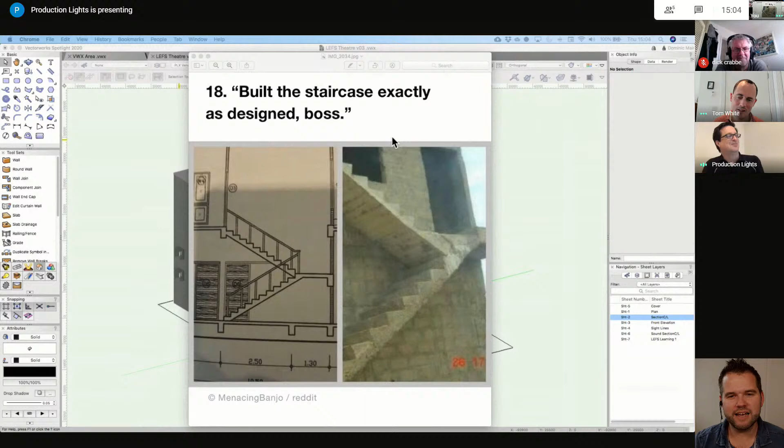Hopefully this will fire screen sharing up. Yep, that's incoming right now. Here it comes, there we go. Cool, yeah, I found this in the week, and it goes back to conversations that Tom talked about, and we've all talked about why 2D and 3D, and why sections and understanding your plans. I hope you can see this - it got built exactly like a section, exactly what was on the drawing. No kidding, yeah, incredible, it happens in the real world. I'm not sure which part of the world that was in, but all good.

So what are we talking about this week? Sections - I'm going to talk a bit about sections. I think Tom's also going to talk about sections in a slightly different way. So we showed a couple of weeks ago with Dick's drawing how I managed to show his information in sections, so we could see where the loudspeakers were going, where they were sitting underneath balconies and sightlines.

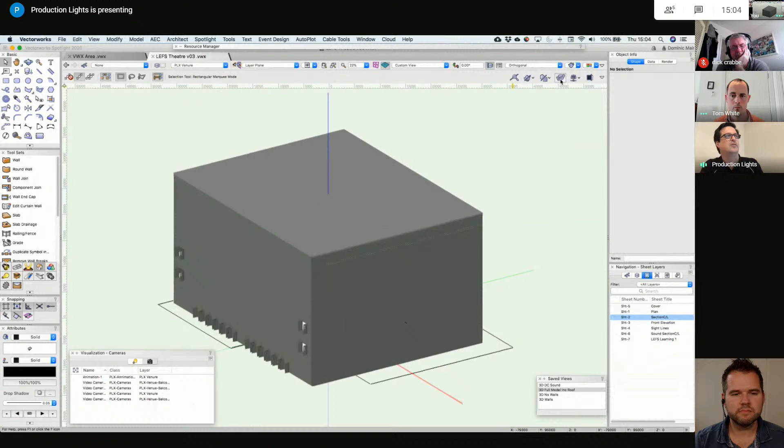And I thought I'd show in Vectorworks how we deal with that and what is possible. So it's back to the theatre I built before, and everything is inside it. In Vectorworks we have something called Clip Cube, and Clip Cube allows us to cut through a drawing in any plane. You can go top downwards, and it's very useful when you're working in 3D and want to see something - you can just clip yourself in.

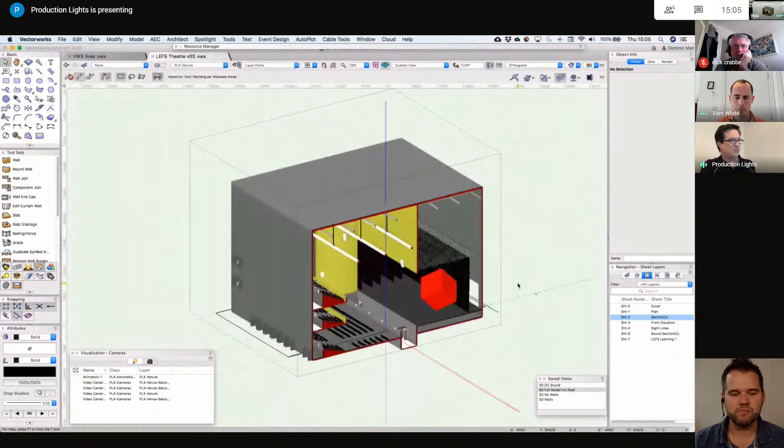But one of its most fantastic features is I can take a face. We can go from there, and look at this section point, which could be the center line. I've actually just come off the center line to catch this piece of the set on the stage. But when we've got the clip cube, I can ask it to section this face. So if it selects a face, you right click on it and it creates a section viewport.

We get all sorts of choices at that point. It's going to call it section 2 because it's looking at a sheet called 'LEFS' - I put something on earlier just to test it and deleted it. We can give it a title, so we'll call it section 2A or something like that.

We can choose a scale for it, so we'll say 1 to 100, and we want to put it on there. Pretty much everything else we leave as is. You can choose classes and layers, what's visible within it. So I'm going to click OK, and hopefully it won't take too long to render this out.

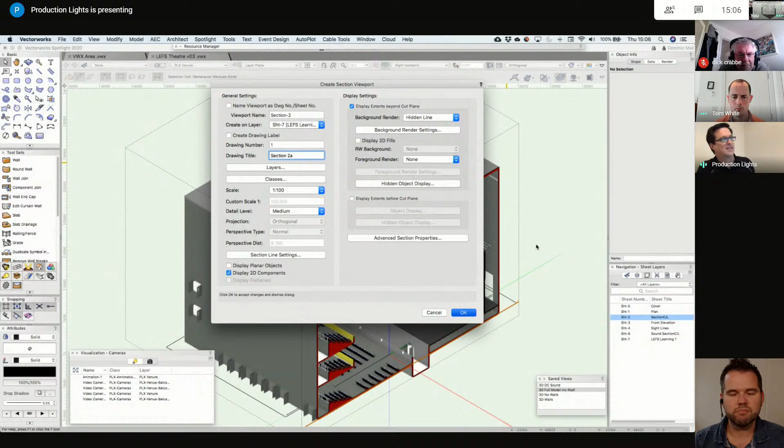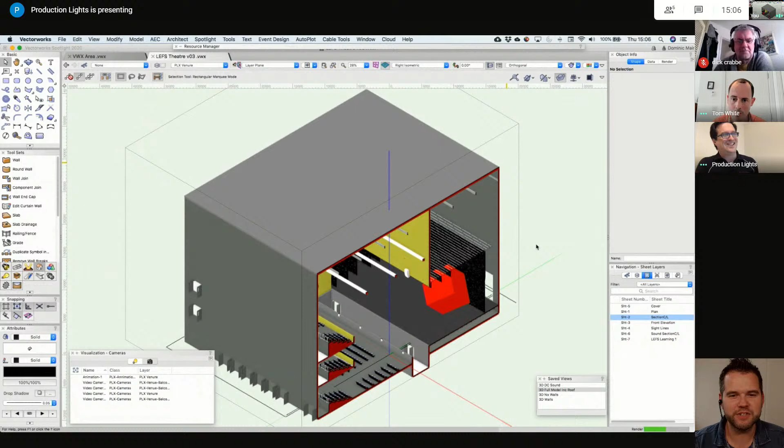What it's now going to do is cut this section. Watch with me in the bottom right-hand corner of my screen - it's going to cut this section and put it onto the sheet for me, hopefully, if I was talking and concentrating at the same time. It gives you an idea - you did very well there, Tom, trying to explain it while driving the CAD machine at the same time. And then there we go.

And it's done it. So we're now looking through that section, and we can obviously see where the cameras are. We can see where Dick's beautiful speakers are, and we can see our bit of set.

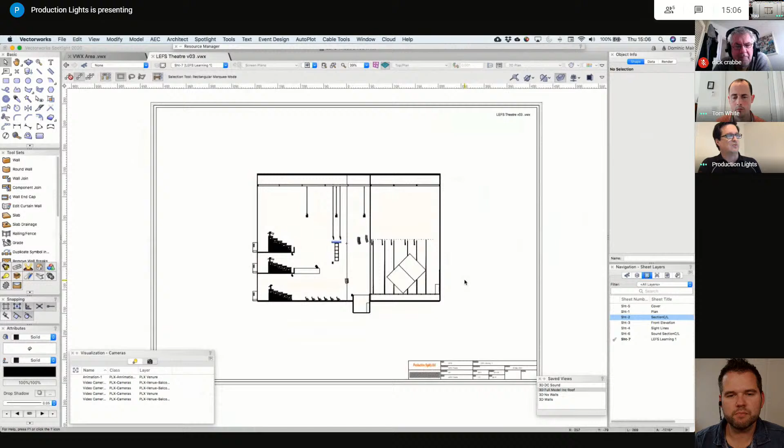A general rule - we haven't talked about rules much recently in CAD - but I'm pretty sure Tom will agree that a lot of people we work for ask us to annotate, so details, measurements and stuff like that within the paper space, within this layout space. In AutoCAD, you would just draw around this viewport, but in Vectorworks it's slightly different - we annotate within the viewport. So I double-clicked on the viewport, and we get annotations, crop, section in place, and design layer we can change.

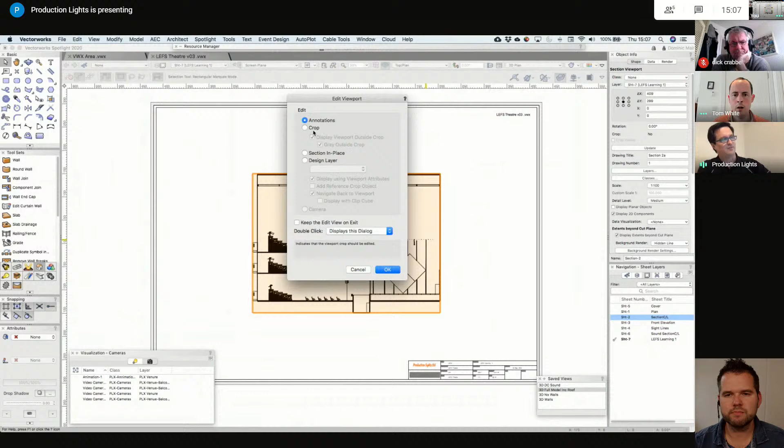The crop is, as it sounds, I can cut out a bit of this section, but in this instance we're interested in annotations. The one I briefly talked about before was sight lines from the upper balcony.

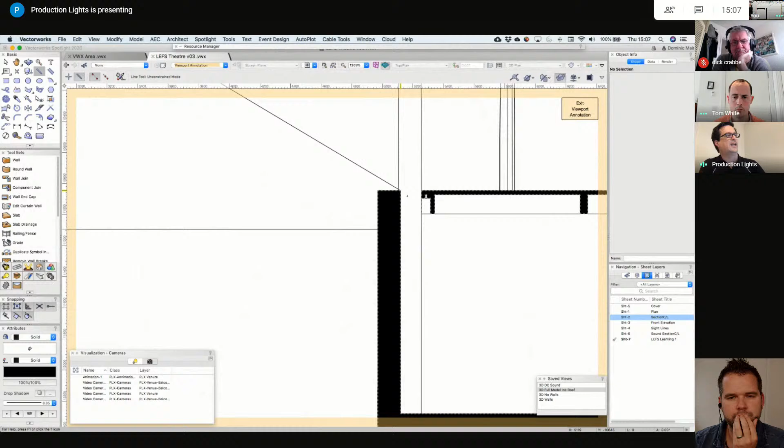So we just grab a line and come out of, say, somebody sitting in this chair slightly above it, and we come down - we're looking at this lip here, what they would not see over the heads of somebody else. If we cut that down to the forestage, so the edge of the orchestra pit, the edge of the stage is just back here, and we drop a line there, we can already see that this balcony is clipping that view.

I know it's a very theatrical way of looking at things, but it's something we always have to consider. So I then select the line again, and we move it back, and we can see at what point, if I bring the screen down, we wouldn't be clipping if we wanted to use that upper row.

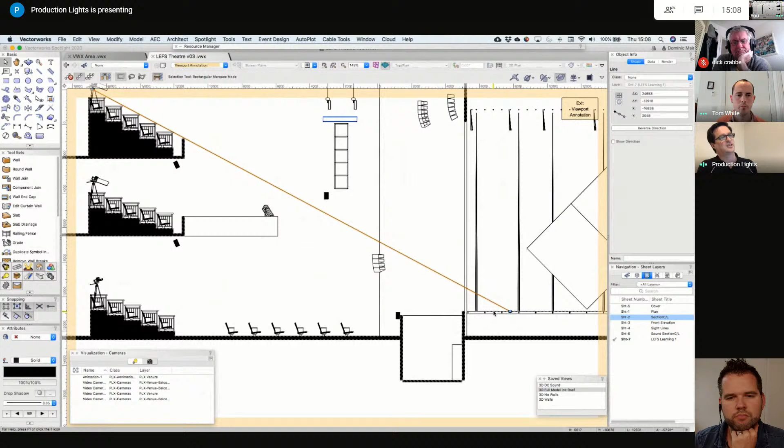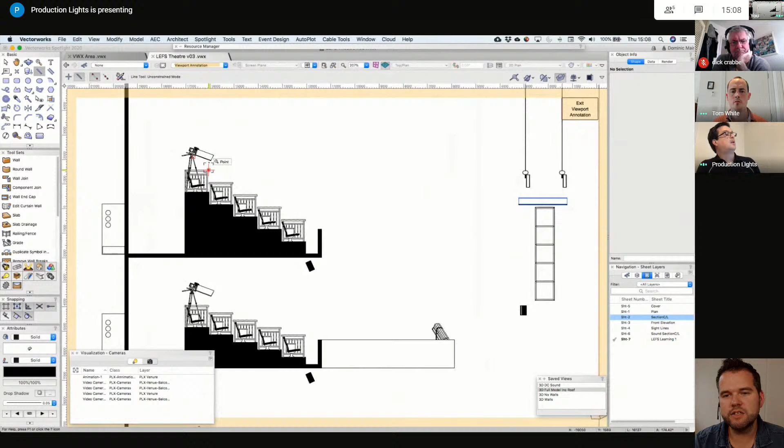It's going to be a good couple of meters back on the stage - you would see their toes from the back of it. Another interesting line is just sectioning - if we ended up just on that... so you're just saying that if you're going to put a camera up there on the back row, it's in terms of whether you'd be able to get a full shot, or whether you'd need to do a kind of mid-chest shot. You couldn't necessarily get down to their feet if they were - you couldn't get a full height shot down to their feet, you couldn't come onto the orchestra pit.

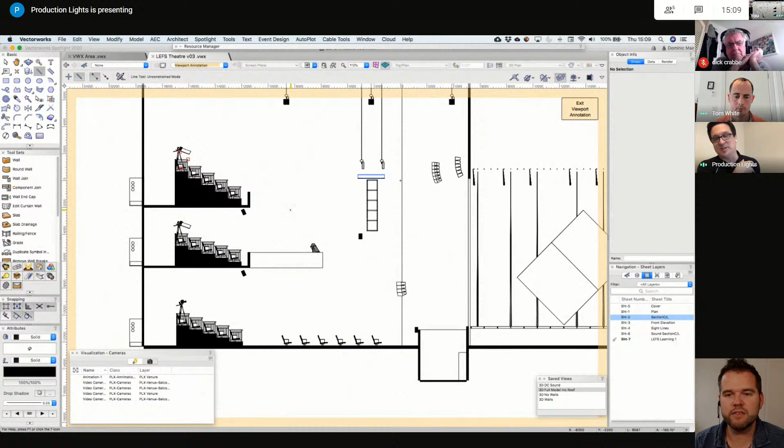More importantly, the punter sitting up there - we can jack the camera up, but the poor person sitting in the seat, which we can't move, wouldn't see something far downstage. Obviously if it's just a standard head or face shot, that's going to be above 6 foot, so maybe it's all right again, I suppose. But if you were doing half body or anything down to the floor, that's different.

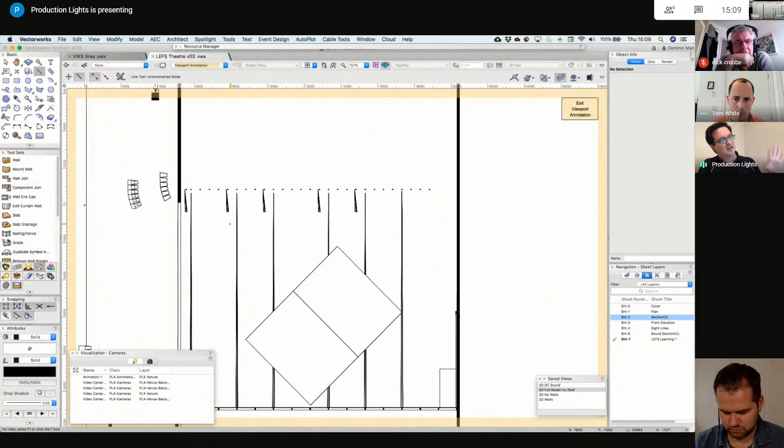And it's exactly the same - again, very theatrical. If we come to the top of the pros and come through, so that'd be the top of the pros - what would be missing if people were flying stuff in above the pros line, at what point they would actually see it. So this is all useful stuff for setting lighting bars, setting speaker arrays. We can see Dick's actual center speaker array here - he's sitting just above the pros line, so we know we're clear, and that's all good.

Another classic one would be if we were a corporate going into a theatre, which is not unheard of, and we wanted to set up a projector somewhere around here. We've done many shows that way.

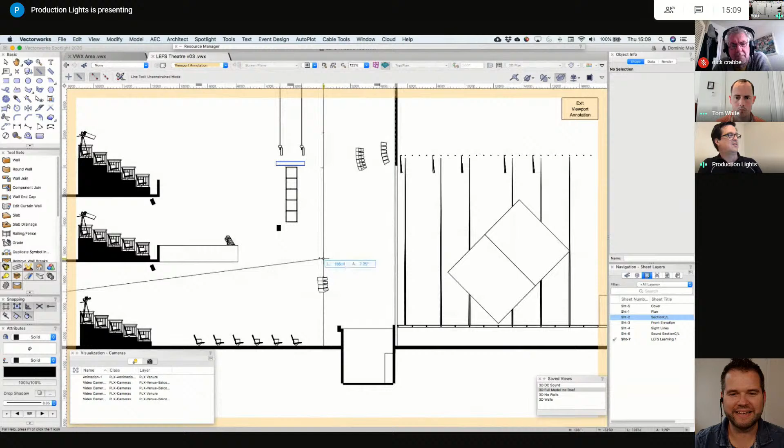What we're actually looking at here is Dick's speaker halfway through. So here's a permanent house speaker, and that's actually limiting how high we can fly that screen on stage. There's our first limit point.

So I would suggest if we were talking in early production, we actually bring the projector up to the mid balcony, and we did exactly the same thing here. Then we get the ability to go much higher within the space, so you can fly the screen higher, and people can walk underneath it, and we're not shadowing, etc.

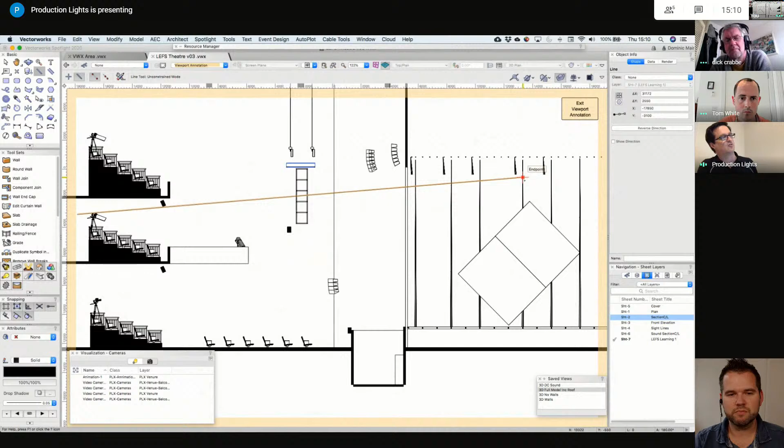So this is kind of showing the importance of sections, and from my point of view, what a section can do in 3D, because that's just taken out of a 3D model. Once we've got this model built, we can very easily move stuff around and find what works and what doesn't work for us.

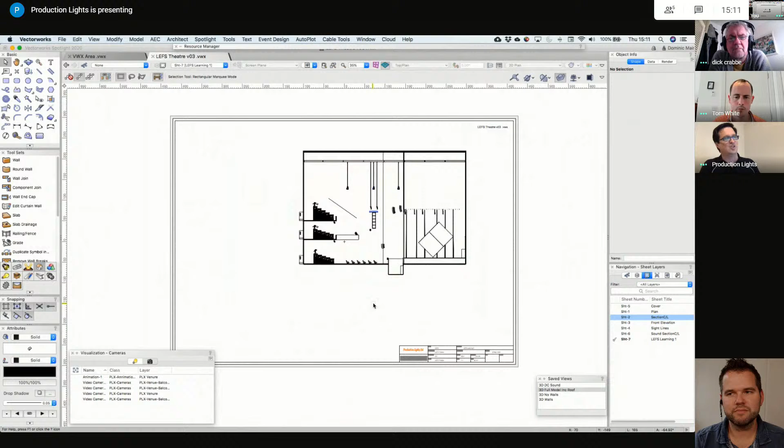It's that first initial data of getting it in there, and then we can very easily edit. I'll just quickly show one more thing that AutoCAD users don't have. If I then draw this line, or draw a line anywhere, when I come out, that line of sectional annotation actually stays with the viewport. So when I move the viewport, I just pick it up and move it, it goes with it. In AutoCAD, that doesn't happen. You have to pick up all your annotation around it and make sure it moves with it. So it's just a nice little thing that Vectorworks does, trying to make life easier.

So is there an option within AutoCAD to do this section through? I'm thinking of the Athens arena that you shared with me—yes, fine, you can see it from left, right, top, what have you, but you can't cut through the middle, or I don't know how to cut through the middle.

You can do, yeah. Let Tom speak. Cool, go for it, Tom.

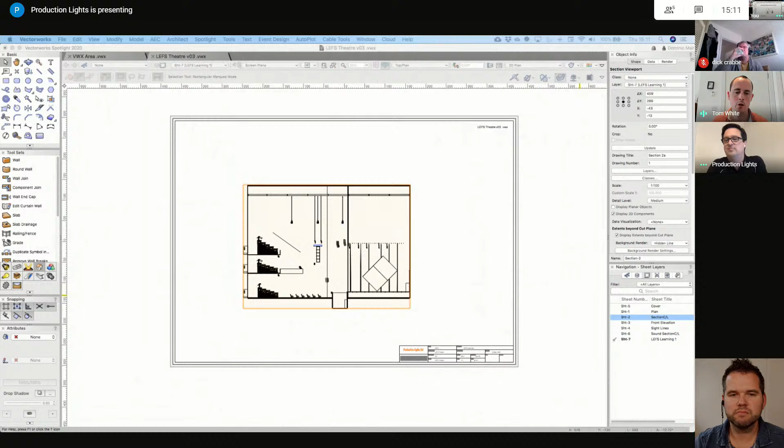I suppose the first thing to say is the description that Dom has very clearly gone through looks, at a glance, a lot easier than doing the same thing in AutoCAD. But the two tools that I would use to do something similar to this is the 3D clip, which seems very similar, Dom, to what you did in the model space. But to produce this, you couldn't do such a nice drawing as Dom did with 3D clip.

So you would use view base, which is the Revit style layout drawing. You'd have to do a plan of the space, then use the section command to cut through it, and that's how you produce a drawing. It seems that the steps that Dom went through is much easier to produce a clear drawing in Vectorworks, in my opinion, at this stage.

It's something I've done both, and the sectioning in AutoCAD would have taken longer to cut through than it did in Vectorworks. I use the section command, and it lays it out separately within the model space, and then you make your viewports from that. So to answer your question, it's possible.

And presumably then you determine the two lines at either end of the section that you want, and do it that way? Do you?

Yeah, so I'm wondering whether I've got something I can bring up. Dom, could you just talk for a moment and see?

Yeah, of course, absolutely. In Athens and in all the models I've done where we've 3D'd, you draw a line through. Think back to when you still drew on paper—you used to have your plan and project up on your plan with rulers, and then you'd start marking up. That's exactly what you're saying. You cut a line in 2D through what you want, then run a section command and it projects the slice up from there looking through the model, which is why it takes a little bit longer in AutoCAD, I think. Maybe Tom has got something for us.

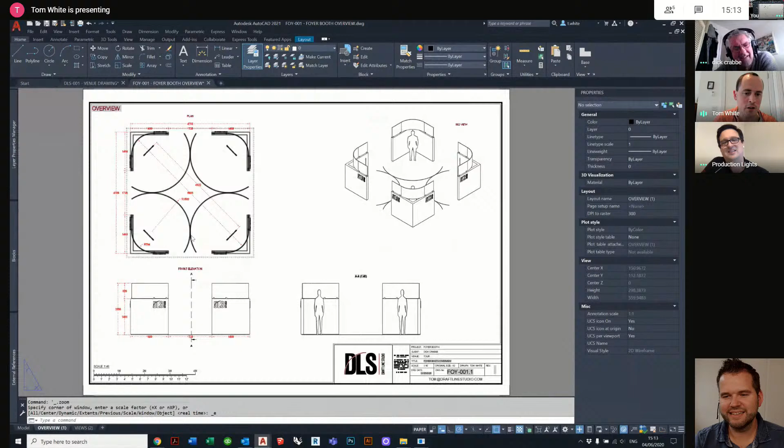So I've got a screen which hopefully you'll be able to see, and I think Dick, you might have seen this before. It's your drawing, but essentially I have drawn—unfortunately I couldn't bring up a venue very quickly, but I've drawn something in 3D. So I've got the model space, I've done shift middle wheel to see that this is in a model space, it's in 3D.

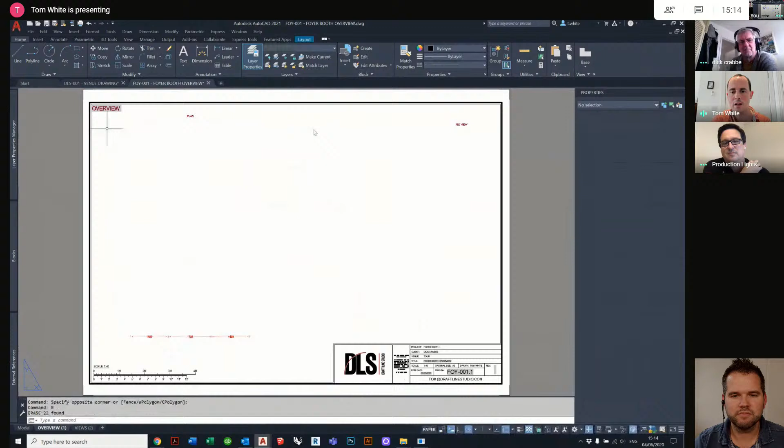In AutoCAD, if you draw something in 3D solid, which is often the way you draw in AutoCAD—not the only way, but often the way—you can use something called view base to do the layout. So if I were to temporarily delete all this information in layout space, I go to the layout tab, I do base from model space.

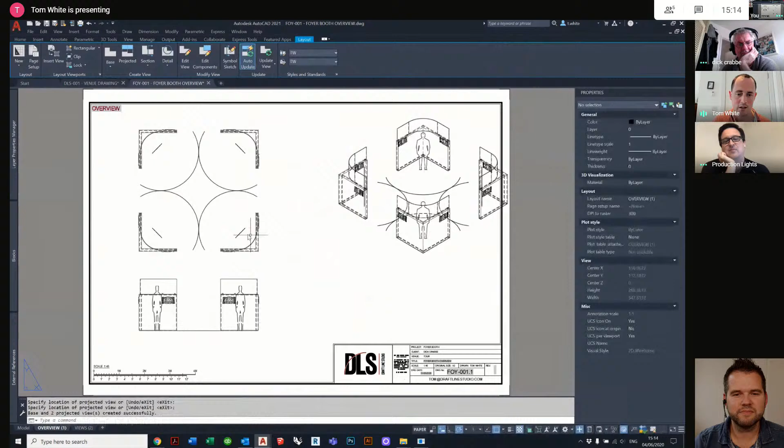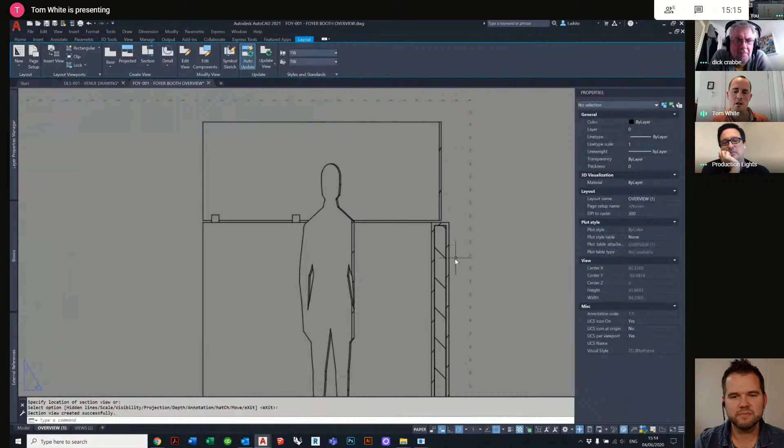This is where, in my opinion, it seems a lot easier in Vectorworks, because to do the section, I'll use the section command here in the chosen location. I let it think about it, pull it down, press enter, and now it's done a section through. You can see it's a section because the person's arm is missing, and you can see the internal construction of this element compared to the front elevation, which is my logo on a wall.

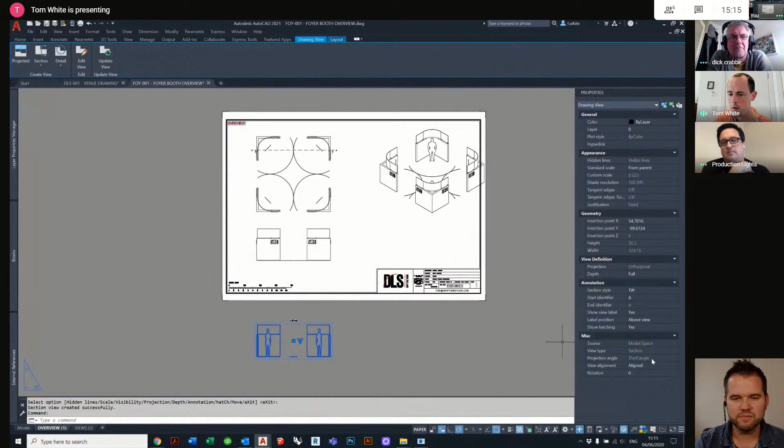So this is my opinion of how you do something similar to Vectorworks, Dom. I don't know if you agree or think that's something slightly different. No, it's getting to the same point - you can give that information. You could have easily cut through a whole building at that point in time to see the section lines.

I don't know if you could explain what Vectorworks is doing, but let me quickly explain what I believe AutoCAD is doing here. In model space, I have a 3D drawing, useful to tell a story, which is why we try to do nice clear drawings, but not necessarily useful for graphics - for example, if you want to import it into Illustrator, which is done sometimes. So the view-based command is doing a 2D representation of a 3D model. As a consequence, we're looking at 4 views, which we know is a 3D drawing, but it's represented in 2D. So what you can do is export layout.

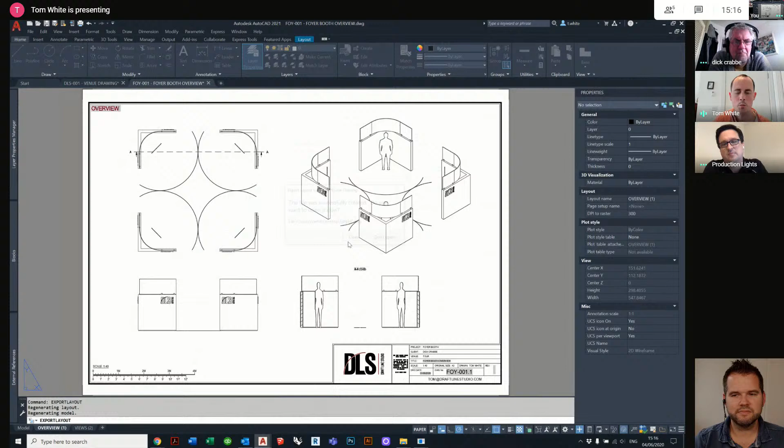You type export layout in the command line, and in this circumstance I'm going to save it on the desktop. What it's going to do is export this viewport into a new drawing. It asks, would you like to open the drawing? I say yes, and do zoom extents. And in model space, I now have what was a 3D drawing totally 2D, which I find incredibly useful.

Dom, could you explain in Vectorworks when you're using the section command, is it a live section through the 3D model, or a 2D representation as it's going along? It's a live section because it's connected - so if I go in and edit something within the 3D model, I just come over here, click update, and it will update my section at that point in time.

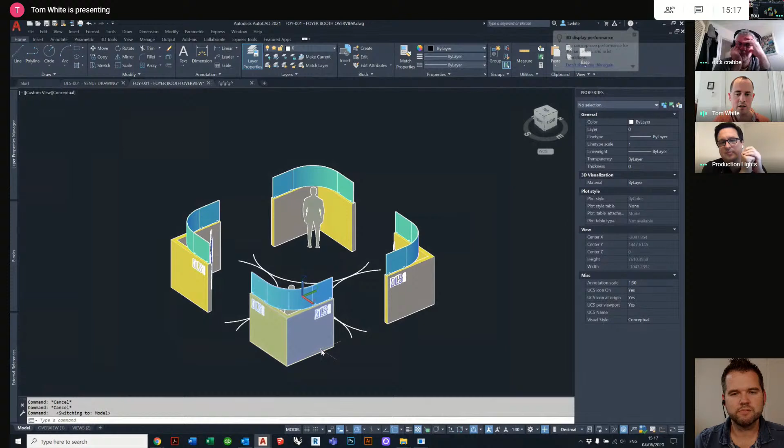It does the same in AutoCAD. I could go into here and delete this and go back to model space. But I don't know if there's something similar to export layout in Vectorworks, though this is a tool I find really useful because it's a totally accurate drawing, but totally 2D. So if I go to front elevation, it's totally flat - it's been flattened. It's a flattened drawing, isn't it? So it's lightweight, but it's not something actually ever done in Vectorworks, to be fair.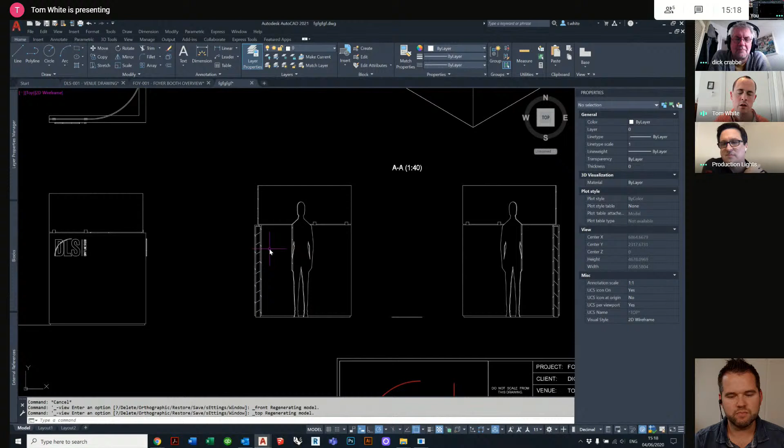No, it's not a tool I use to flatten. If I have to flatten a drawing, I tend to flatten it, but exporting beyond that isn't something I normally need for workshops, because Vectorworks has a fantastic ability to send to a graphics company or something like that. It's probably the negative limitations that AutoCAD has. The section command you were showing us in model space - you technically have something vaguely similar in AutoCAD, but I don't think it's as powerful as Vectorworks. This is my only way of knowing what it actually looks like in 2D through that section line. It's probably much easier in Vectorworks, and this is my opinion of one way you can get around it in AutoCAD - exactly the way I would fiddle my way around it.

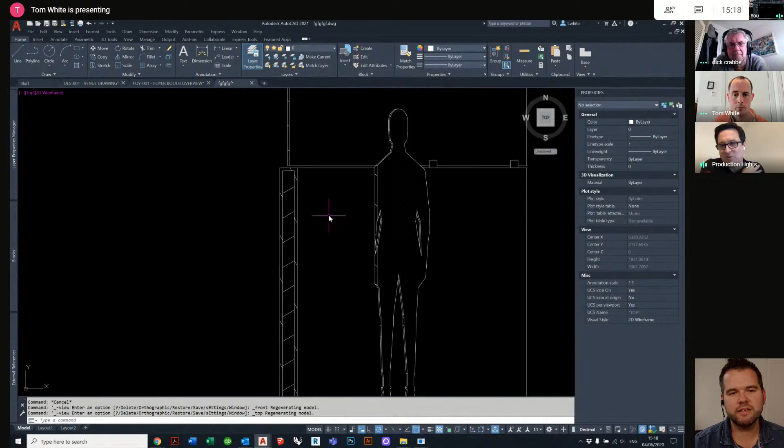I guess the key thing is that different software achieve things in different ways, and there are benefits to either route, but sometimes it's about what you know. The speed at which we've seen Tom do some of his demos is absolutely incredible, but it does look as though there are maybe in Vectorworks some workflows that are much quicker in the first place, which I think is quite interesting.

Dick, have you found any elements in DraftSight that you haven't been able to do, or have you found everything you wanted to do so far? I think that one's interesting because it's such a different price point compared to the other packages.

I think at the moment I haven't found anything. I'm slightly struggling, but I ran out of time with getting the Lisps to work, though it understood them, downloaded them, and can definitely do them - that really is a brain ache. But as far as I can see, everything so far has worked, and so many of the commands, even if they're not exactly the same, it seems to recognize and turn them into the command it should be for DraftSight. The attributes all worked too.

I'll just very quickly, to answer Dick's question, show you a section of Oakland Arena. I hope it'll come through. Got it? Yeah, you got everything - that's everything in one go, Dick. So that's set, screened, rigging, building, all there.

That would have taken absolutely ages in AutoCAD to cut through. It took a couple of minutes in Vectorworks - did make all my fans spin on the computer, but it's exactly the same thing. So between theatre and the arena, there's a cross section through the centre line, and each way, X and Y, so people can see where stuff is. It gives a graphical representation.

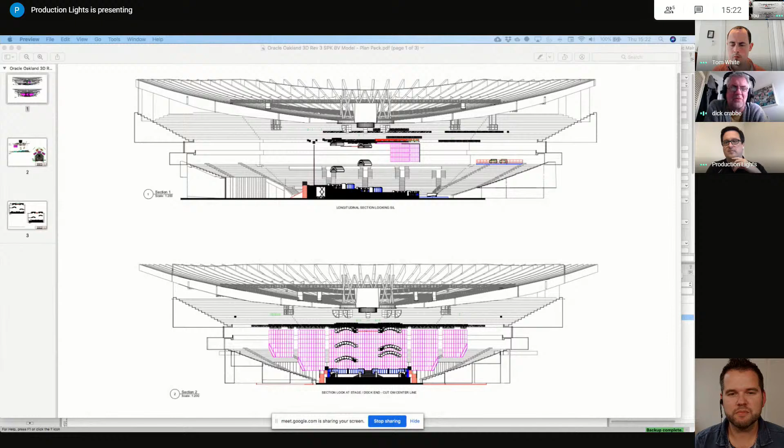This is one I've played with, and I think I showed you briefly a couple of weeks ago, of turning it into d&b's ArrayCalc, which is what they use as a sound prediction tool. It took me about 2 hours to map that venue into ArrayCalc, but I'm trying to use it to tease D&B to get them interested, and maybe other sound engineers too.

So that we can try and build up a point scan of venues, so that rock and roll touring technicians who are daily changing venues, if all of the venue plans are there, they can just import them into whether it be L-Acoustics or D&B, whoever's prediction software, and actually get an accurate plan straight away, and let the computer do the thinking of where the array should go and how they should be hung. It's something that is so easy once you've got an accurate plan.

It is amazing, really, to think we spend such a lot of our lives trying to fix the sort of ropey venue plans that we get given. It's incredible the amount of time I've spent tracing a PDF, trying to guess whether it's right or not, then going and doing a recce and checking a couple of walls or doors, or in some cases measuring up a lot of the room manually to check back against the PDF I was given - and then, oh look, the PDF was insanely miles out. In this day and age, we shouldn't really be working that way, right?

No, and as Tom says, it's the biggest part of the cost differential within drawing - how good is that initial data. If you've got to go back and spend a day checking it and redrawing it, it's crazy, when we know we can easily generate accurate data very, very quickly.

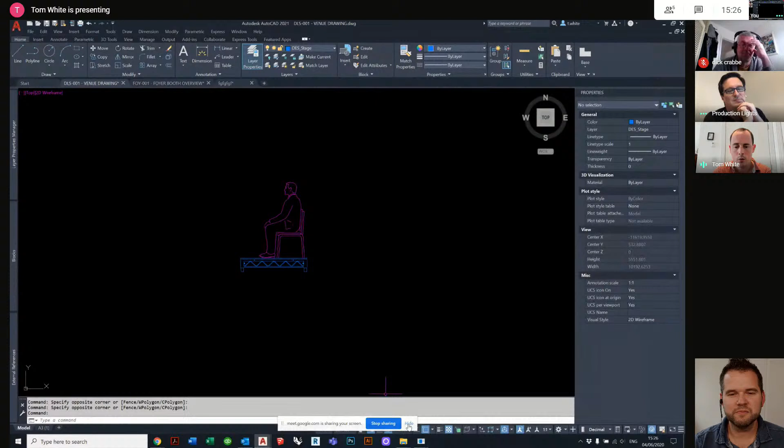I'm going to talk about sections as well. It's much more basic than Dom's amazing information, but potentially helpful on a small scale. A few weeks ago we were talking about how you can have different elements of text or dimensions within a block. A block is generally an item repeated many times in a drawing. In this circumstance, we're going to think about a block that can have change elements on it, but still be named as the same block.

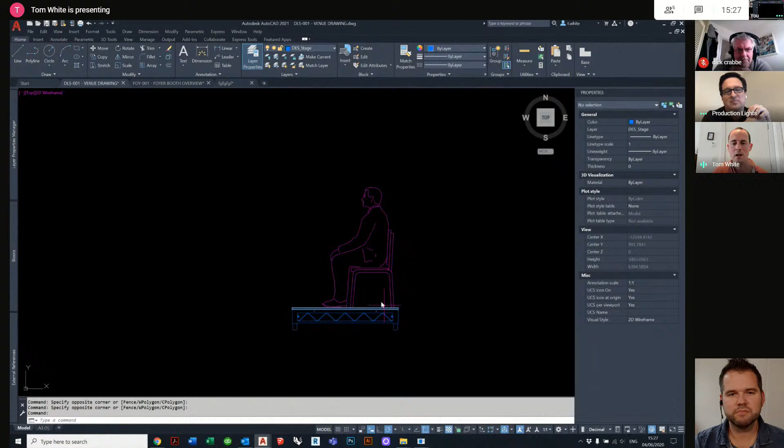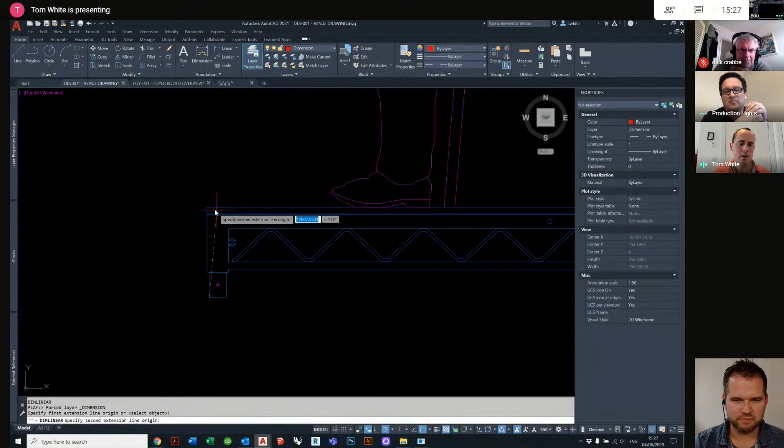In this circumstance, I'm looking at a person sat on a chair - this block is called 'person 79 seated', so it doesn't mean anything to us at this stage. But what this is, is a steel deck, a 4 foot deep or 1220 deep steel deck in section with scaffolding legs in the corners. In this circumstance it's 250 millimeters high. This is my opinion on this drawing - that's the minimum increment I desire for this steel deck. So I want this steel deck to be 250 millimeters high.

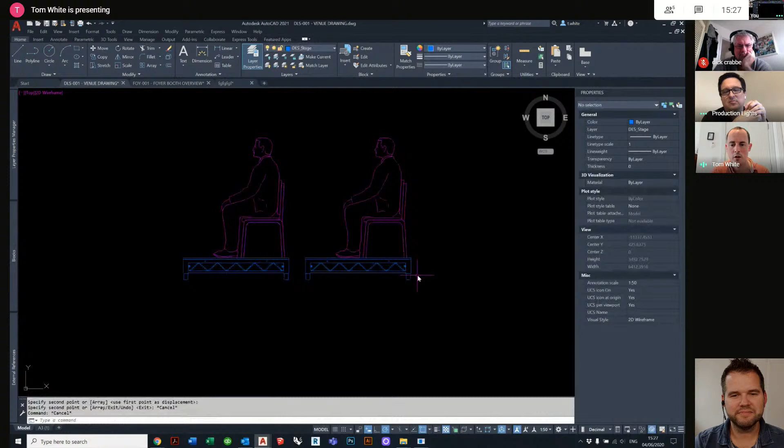What I can do is move this across by 1220. I can then figure out I moved it the wrong measurement, so I'm going to move it a different, arbitrary measurement instead. I'm going to stretch it up, but I don't know what measurement to stretch it up by - let's do 250 millimeters. Or, we can turn it into a block and make it a bit more user-friendly.

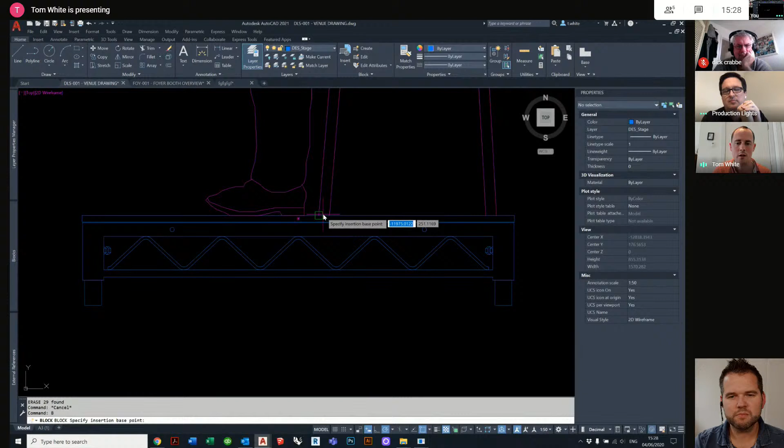So I'm going to create a block called deck section 1. I'm going to set a base point at the top of the deck, and include everything, including this person sat down. I'll click OK, and now go and edit this block.

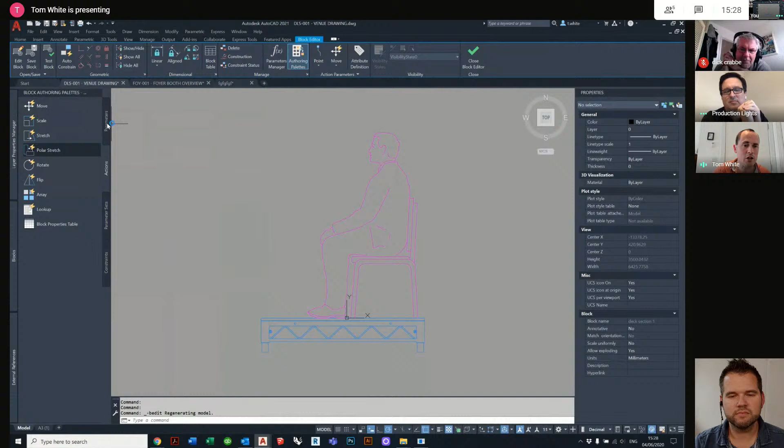In the block editor, on the left-hand side you have parameters or actions in the authoring of this block. What I'd like to do is have the block give us information about the height it is off the ground, and have the steel deck legs change height on my command, rather than having multiple different blocks of decks at different heights.

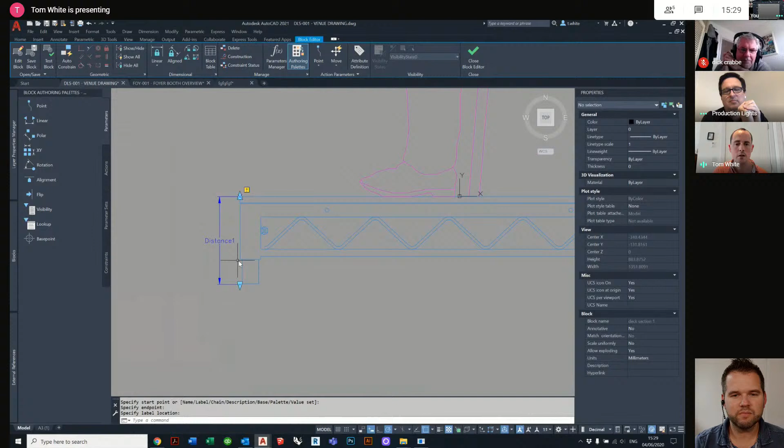So I'm going to do a linear dimension of this height. What this is telling me - we're going to use it as a command in a moment. So you think, well, why does it not have any information in it?

All it is telling is the fact that point 1 and point 2 are a certain distance apart. In this circumstance, I know it's 250 millimeters, but we can edit it in there later on. We want to add an action to that dimension.

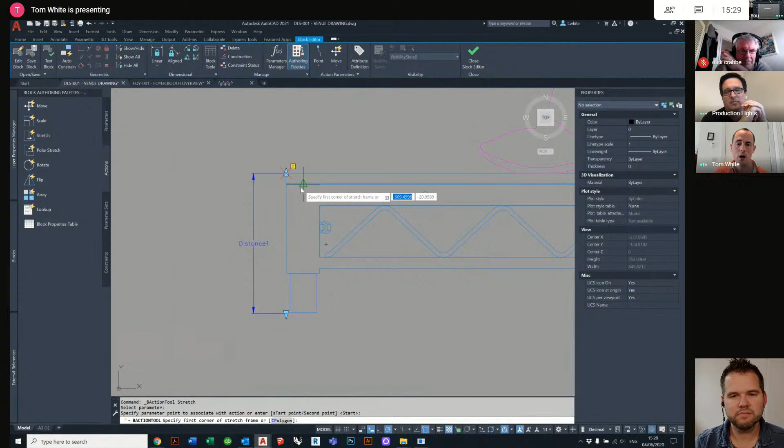So I'd like to use the stretch command. I'm going to select the parameter that I choose to change. I press enter. I'd like to select the location that I'm going to pull from. So in this circumstance, it's this height. I apologize, I'm going to press escape.

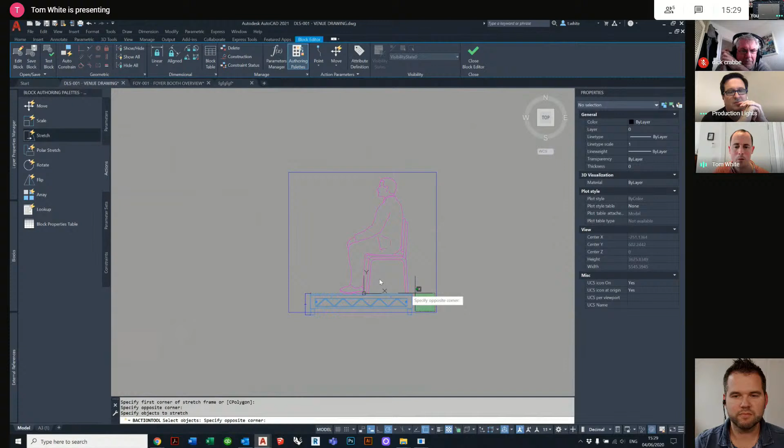I'm going to do that again. I'm going to do the stretch command, press enter. I'm going to select the point here, and select everything I desire to stretch. Within that block, everything is going to be stretched. I'm going to press enter, and close this block. So save that.

So now I have the insertion point of this, so I can drag this to wherever I desire, but I also have an up arrow, and this up arrow is telling us it's 251.97 millimeters, which is a bit unfortunate. So I've done the wrong measurement. But what I can do, I can change the height. I am going to undo that.

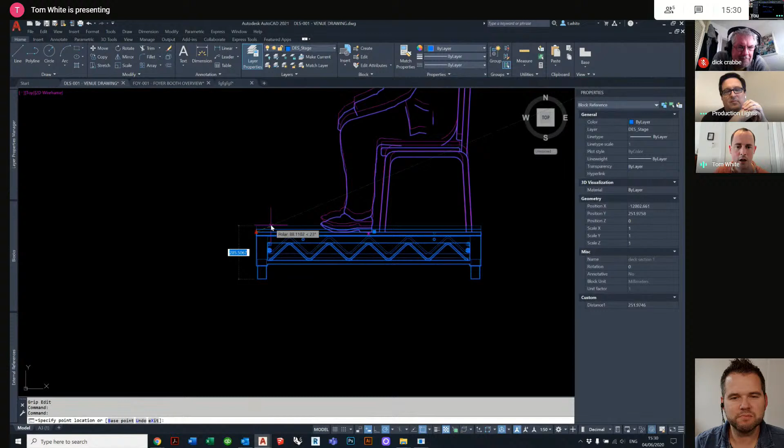So what you can see is that height will change to anything you desire. There's any height at all, and you can put a height in of 800 millimeters here. But I would like to make it a bit more user-friendly.

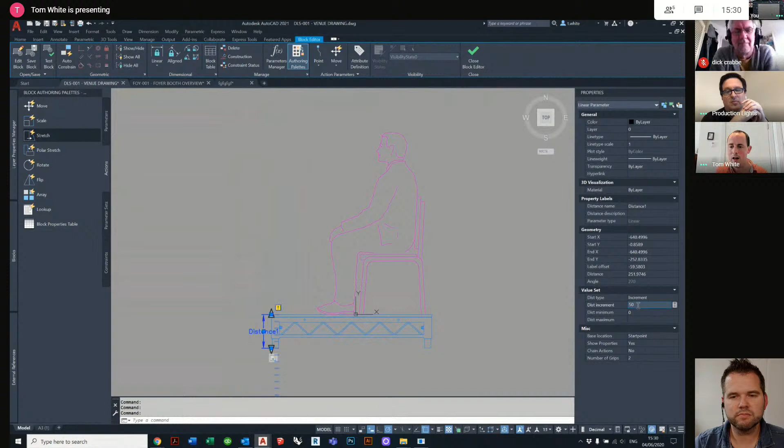So I'm going to go to Block Editor. I'm going to click once on the distance command. In the right-hand side in the properties, I'd like to do an increment of something. So in this circumstance, I'm going to increment to 50 millimeters and a minimum distance of 250 millimeters. I'm going to close this block and save that.

And Tom, just to jump in there, that's because you know those tend to be for the scaffolding legs. Those tend to be the increments that are available from the rental companies. But the production manager might be working with a particular rental company that might only have 300 mil legs, or there might be 300 and 600, 900, or whatever it happens to be.

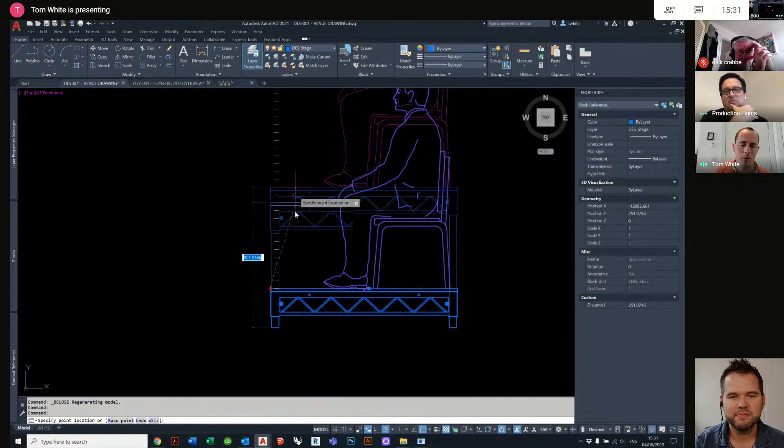You're entirely right. So in hindsight, potentially, maybe I should have done it as 150 millimeter increments, which is 6 inches, Dick, because I think I would agree with you entirely. But yeah, in this circumstance, I've done 50 millimeters, and you can see it will snap to 50 millimeters. I apologize for making a mistake in these to start with by setting it as 251 millimeters rather than 250, which is a bit of a shame, but never mind.

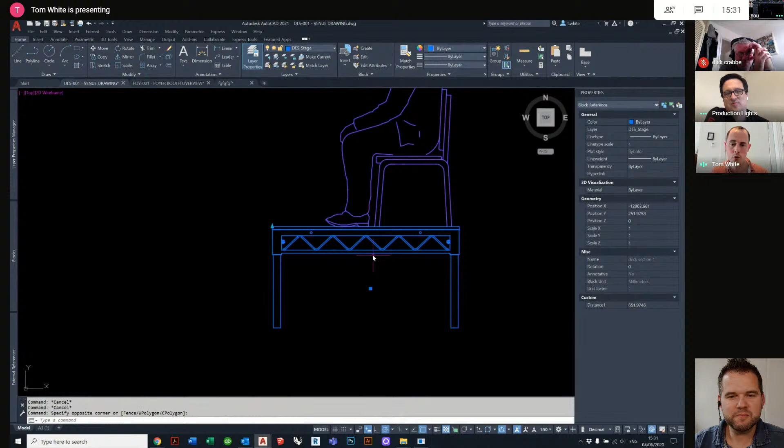So therefore, it's always the point is there, which is a bit annoying. But the reason I would do this is to have a discussion with Dick or another production manager, and to do a task which can be done in many different ways. But in my opinion, it's the most efficient way I personally can figure out how to do it. So I'm going to press Escape and move over to something I've done already.

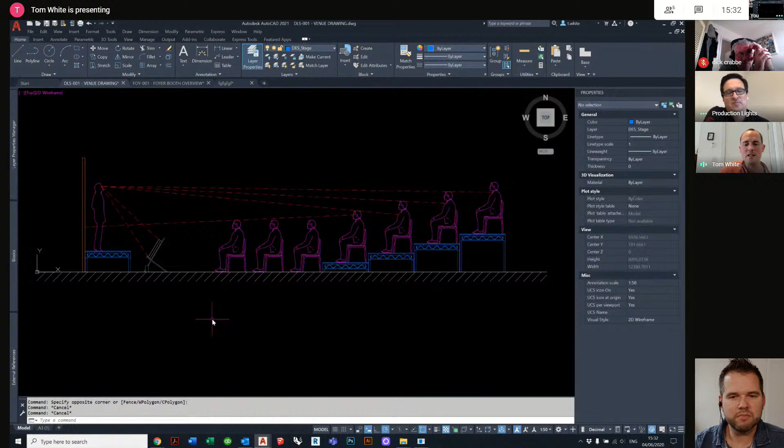So this is one opinion of a section of a totally made up venue. On the left hand side, I have a stage with a prompt screen with a flat behind it. I have 3 rows of chairs on the ground, and then I have these different blocks going up.

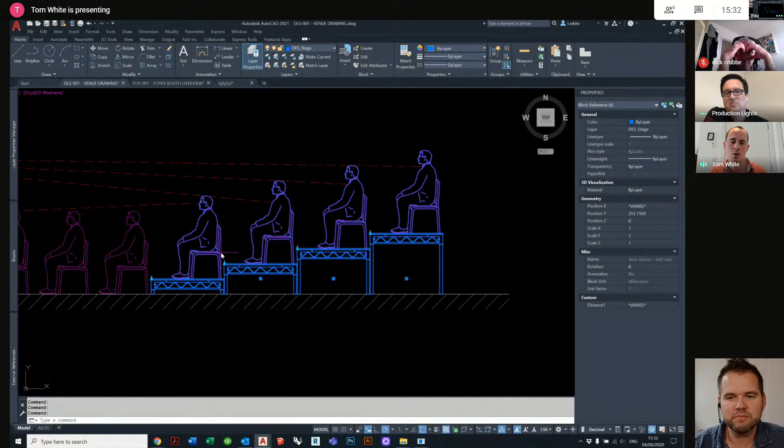So the reason I selected all 4 is in the right hand side you might see block reference in brackets 4. So there's 4 elements which are all blocks, and the most important thing is under miscellaneous, the name is one name. In comparison to when you select, we'll press Escape now, 2 blocks which have 2 different names. So it's 2 blocks, but the name varies.

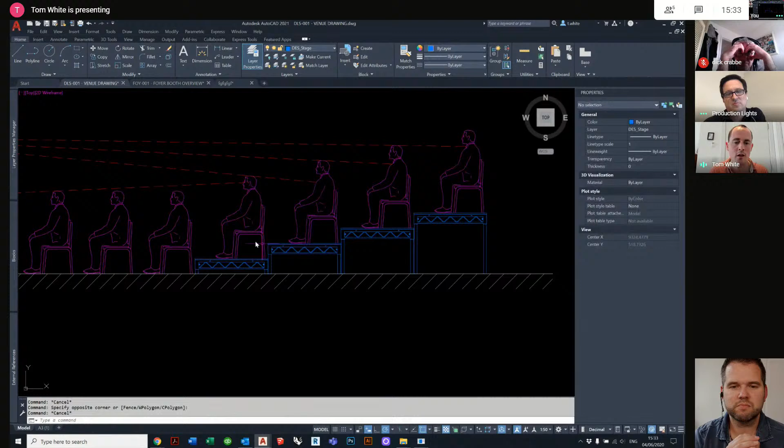So just to clarify, this is 1 block with a distance added to it. And as a consequence, rather than, because you can definitely do it with 1 block, so you can explode it, and I can do a block here, and I could copy that again, or I could explode that, etc., etc.

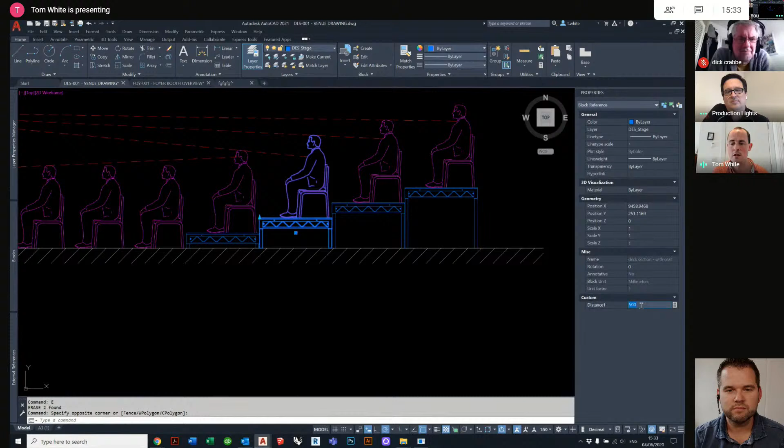But what this is, it's quite a useful tool to have an open discussion where Dick says, well, I have no idea why you set it at 500 millimeters, I can only do 550 millimeter legs. So you can quickly set that. And this one, it has to be lower, for the third row on the raised riser has to be lower because of the headroom above it. Or this one, it needs to be 1.5 meters because there's going to be a camera next to this person, or whatever. So it's quite a useful tool to go through different steps.

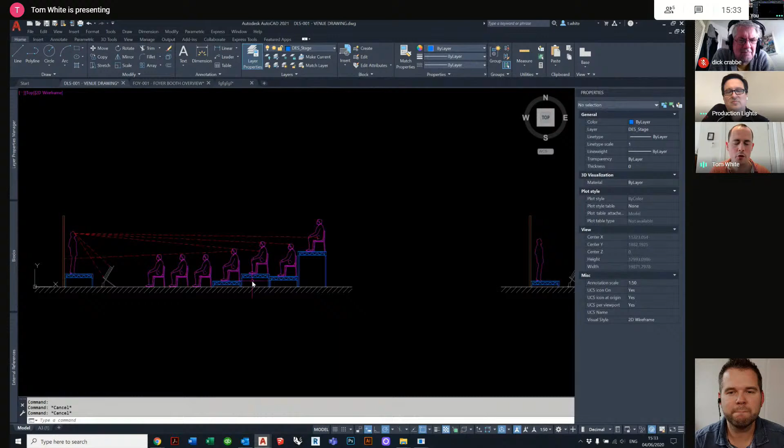And I'm going to undo those for a moment. And the reason it's quite useful is in this circumstance, this is probably maybe more cost effective because you might need to purchase less treads.

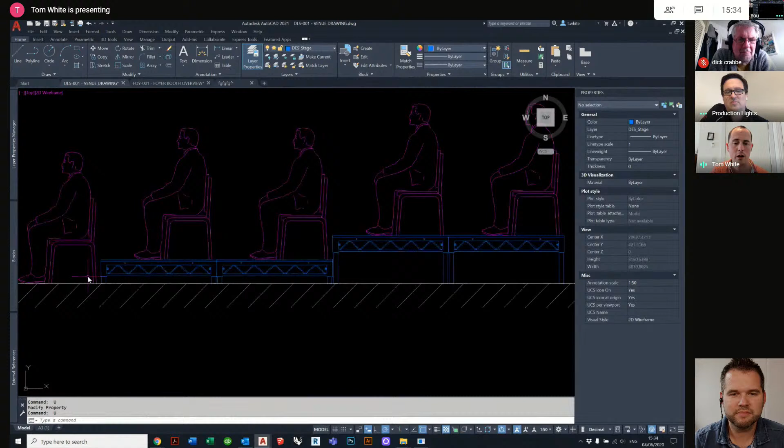So for example, in this circumstance, you'd have to buy a tread for each step. In this circumstance, we're going to save a bit of money, so we're going to have one tread for here and one tread here, but we just need an opinion. So Dom earlier was talking about sections or sight lines through the section.

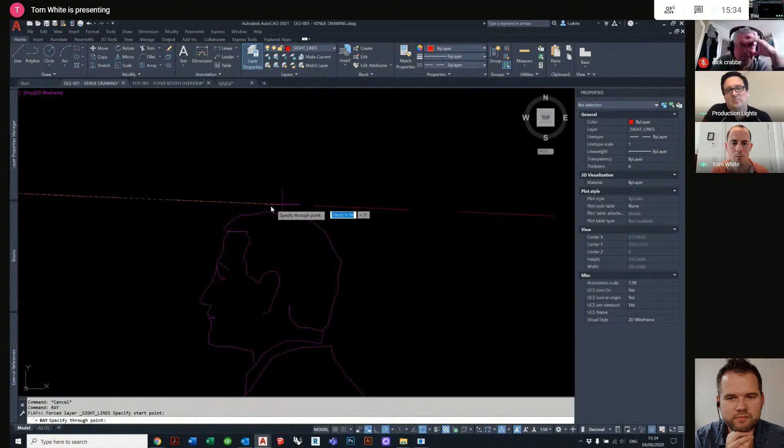I'm going to use the ray command, which is a line that goes from a point to an infinite point in the distance. I've selected the eye of this person on the stage, and I've selected the hair of this person in the 5th row or so. You can see that in this circumstance, the presenter can see the head of the 6th row, I think. But at the same time, we just need to say, can the presenter see the prompt screen?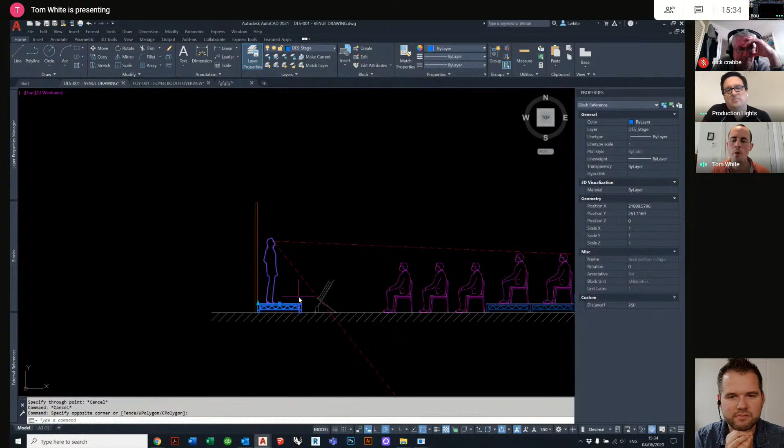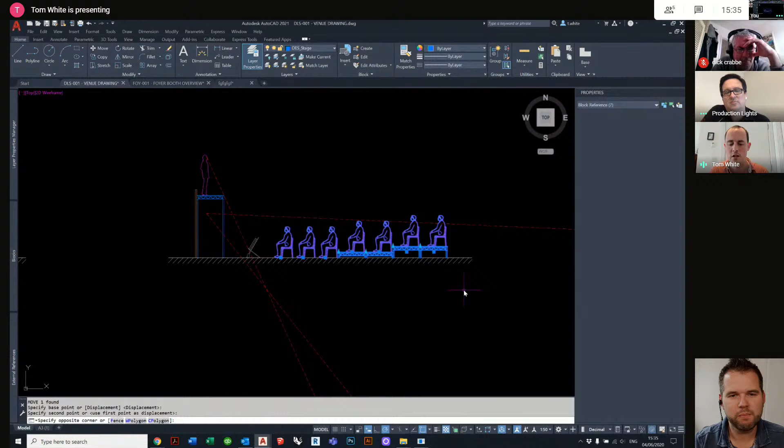Which is fine. But the client says, why is the stage not 1.5 meters off the ground? A bit of an extreme situation, but you realize in this circumstance, the prompt screen can't be seen. So therefore you say, oh, that's fine, let's move the prompt screen to there. But then the prompt screen is too close to this first row of seats, so they need to move that back, and then the venue is too small. So it's just quite a useful tool to quickly play around with what's available.

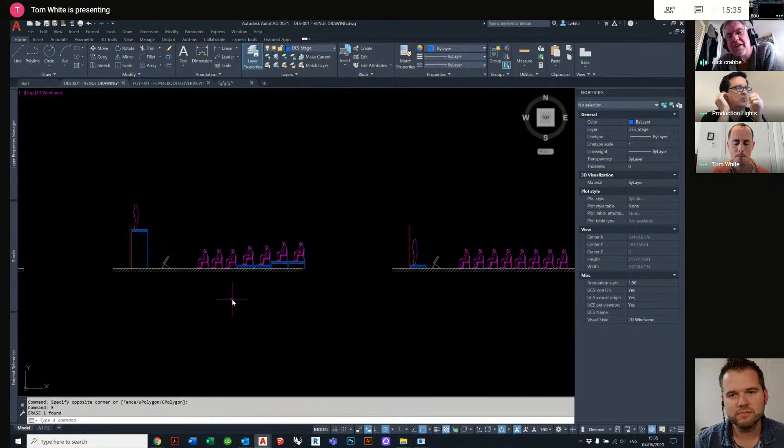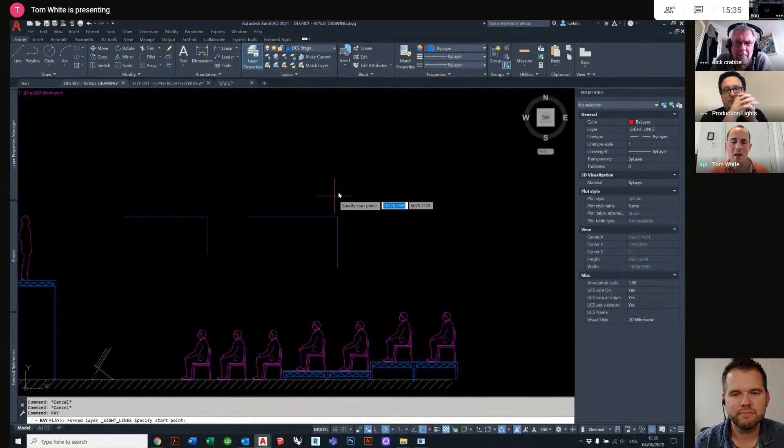So in AutoCAD, there's a line which is a straight line, and if I do the line command, I do a horizontal and a vertical, that horizontal is not joined to the vertical. I can use a polyline command, where I go horizontally and vertically, press enter, and those two lines are joined together. The Ray command has a starting point, but it does not have an end point, so it could go hundreds and hundreds of meters, and you'll never find the distance. There's an infinite length to it. So that's why I find it incredibly useful for a section command.

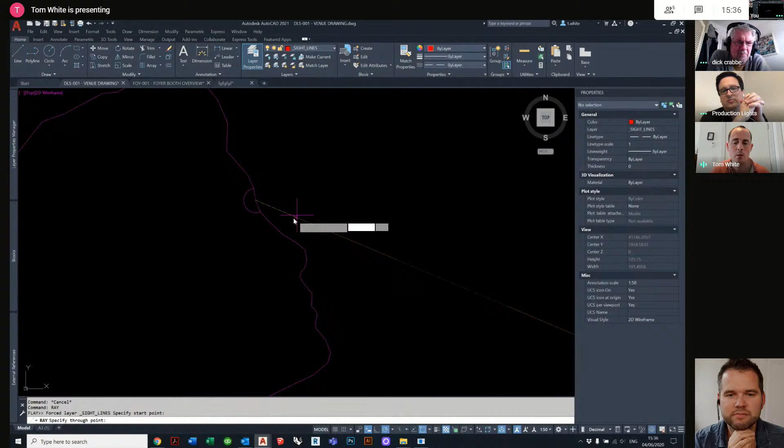A sight line - so the Ray tool has a starting point, in this circumstance somebody's eye, and the intersection of the eye in this circumstance is the top of the prompt screen. So we can prove that the presenter can see the toes of the first row of seats, if that's useful in that circumstance. Maybe it's a shoe show, so they want to look at people's shoes.

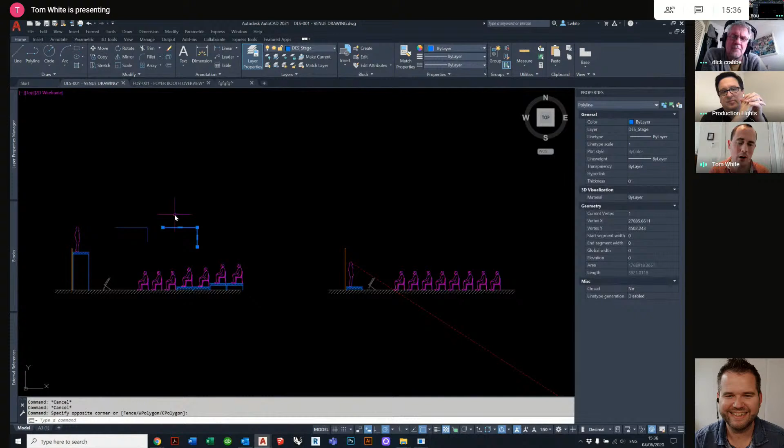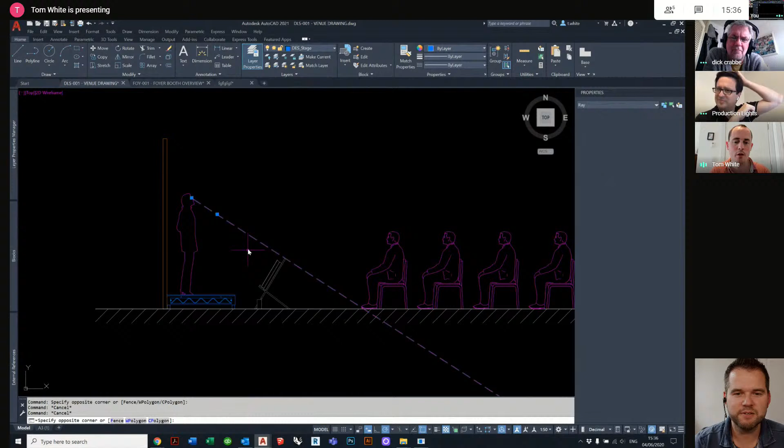So we have a line, we have a polyline, or we have a Ray. There's also another tool - that Ray command is amazing, it's absolutely brilliant. I've just been scaling my line all the time - clicking the 2 points, typing scale, going back to the start, and then going 5 times 5 or whatever to scale it through. Whereas that Ray just shoots straight to infinity. That's another perfect way of doing it, Dick. No, Ray is better. I love it, I've learned something new.

So another way is if you use a polyline, you just put a circle to extend it to something, and use the extend tool to extend to that line. That's another way of doing it. So a Ray is one point to an infinite point in the distance.

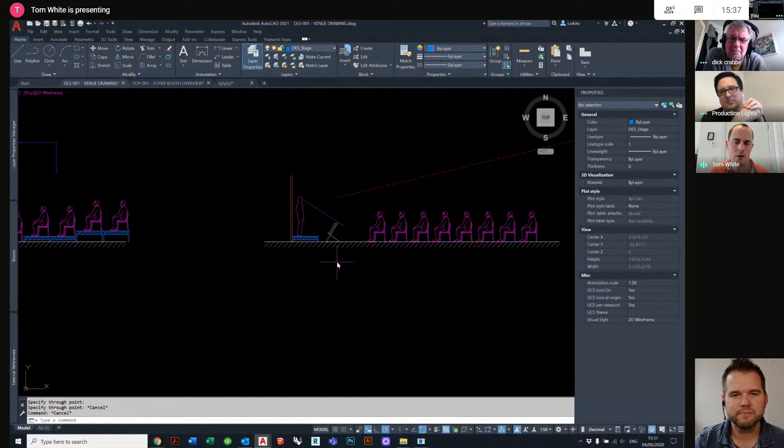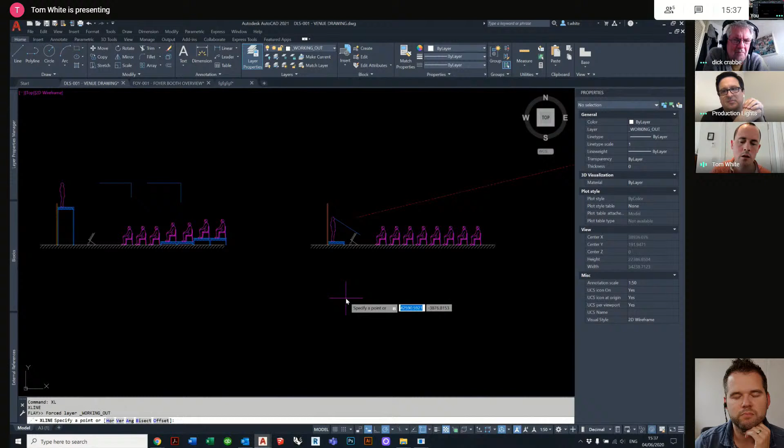Another one I'd use all the time in comparison - Ray is very specific, I'd use for a sight line, but a construction line or an X line is the same idea, but what you're doing is you've selected the center point, and you have a line which is infinite in left and right. I use it more - my shortcut is XL for X line. Rather than placing it, I'd use a horizontal or a vertical, so H for horizontal, and you've got a horizontal line which is infinite left and right. And then you can do another one, a vertical one, and just trim to it. So that's how I'd often use a construction line.

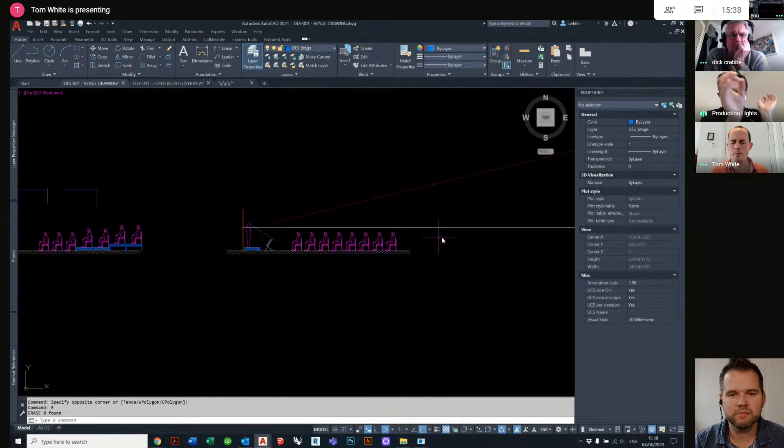I find X lines hugely useful when I'm in CAD. I think it's because I'm really old and I started on paper, and it's like having construction lines on paper, and it allows you to start blocking stuff out really quickly and easily. I think we talked about it early on, about if you're in a room, just putting plan lines down, seeing restrictions really quickly before you do anything else. X line is a really useful tool for everybody to get their heads around.

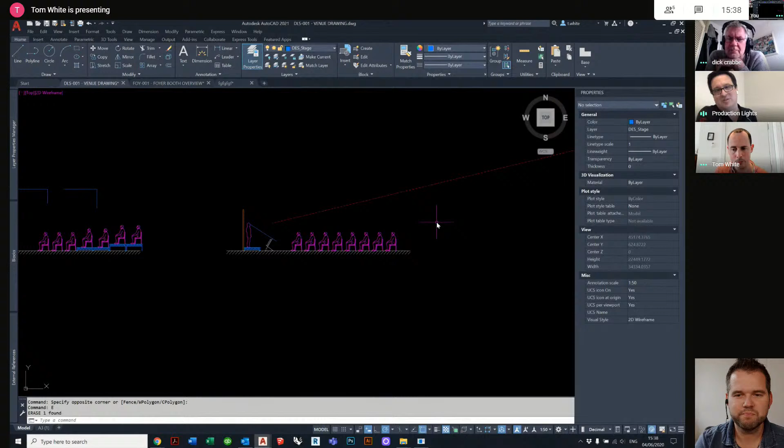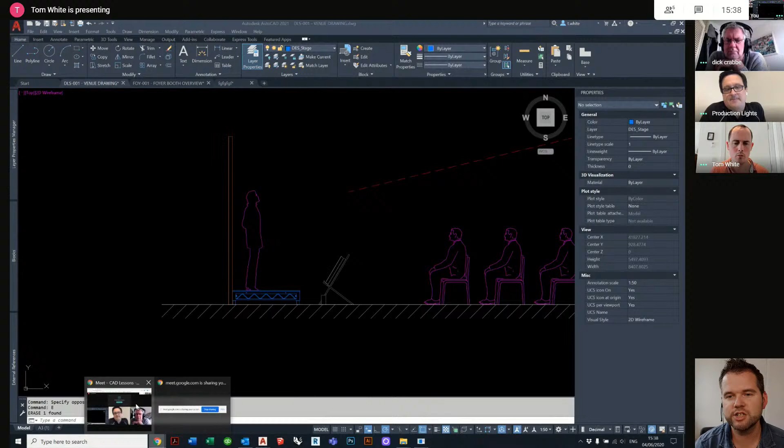And again, dynamic blocks, as you showed the rest are dynamic blocks - I think for workflow, if you can build blocks around like Tom did and keep using that block again and again, it's going to save you so much time. With dynamic blocks in particular, being able to include those parameters takes you a step closer to parametric modeling software.

We just need somebody to own this - we need CAD to build out a production library of those dynamic blocks, in the same way that Vectorworks have done for Vectorworks. Yeah, and I think that's the success of Vectorworks - they put effort and time into Spotlight, and bought up libraries from people who built them independently. But that's the power of it, editing time at the end of it all.

Very good. Dick, do you have any questions on either of those things? We've been talking about sections today, Dom doing some bits in Vectorworks displaying those sections, but also the dynamic blocks thing is really quite powerful, the next step on from just a normal block.

Yes, so dynamic blocks has got to be interesting. So the rays and the construction line - do they print the same? Are they on the same layers, or are they just part of the model space?

As far as I'm aware, they print identically. But what you can't do - if you were to draw a stage that's 10 meters by 10 meters and put a construction line through the center of it, when you zoom extent, it will only ever zoom extent to that 10 by 10 meter stage. It won't zoom extent to the whole construction line because there is no end to it. Yeah, understood, that's good.